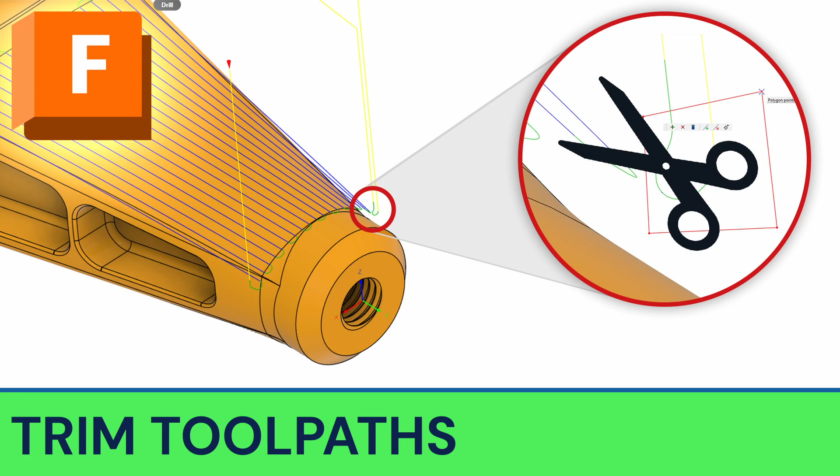How to clean up your toolpaths using the Trim Toolpath feature in Fusion. So I have this part that I downloaded from the Titans of CNC Academy, which is a great resource if you're looking for sample parts to practice programming.

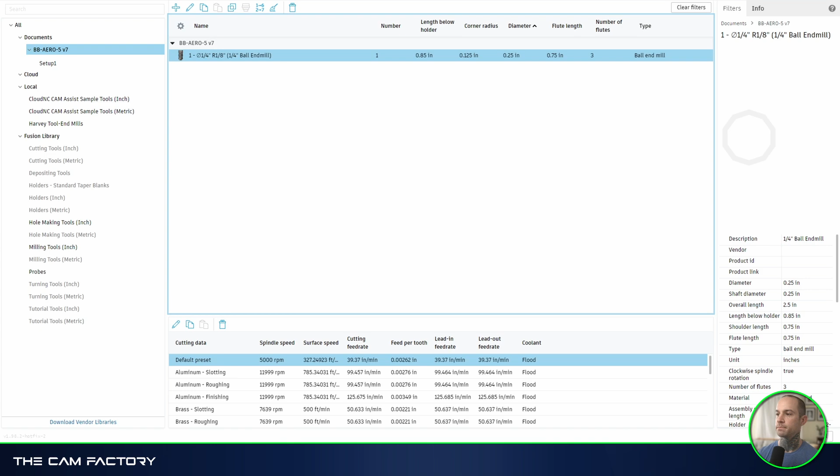I'm going to go up here and select a flow toolpath. I am going to use this face as the drive face. I am going to set my tool orientation, and let's just grab a random tool. This ball mill will work. And let a toolpath generate on there.

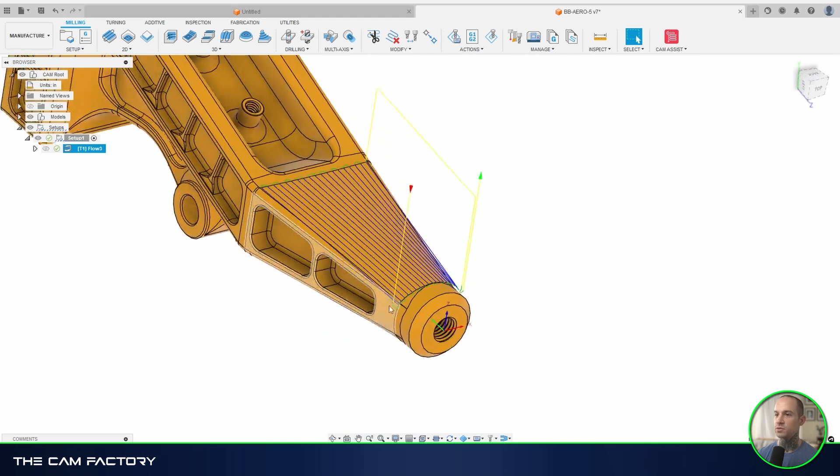Okay, so now we have a toolpath. And as you can see right here, there's an extra pass that I don't necessarily want on here. The rest of the toolpath looks pretty good. Nice even step overs blending from this line to this line, exactly as I would expect from a flow toolpath. But let's go ahead and get rid of this. And I'm going to do that with the Trim Toolpath feature here.

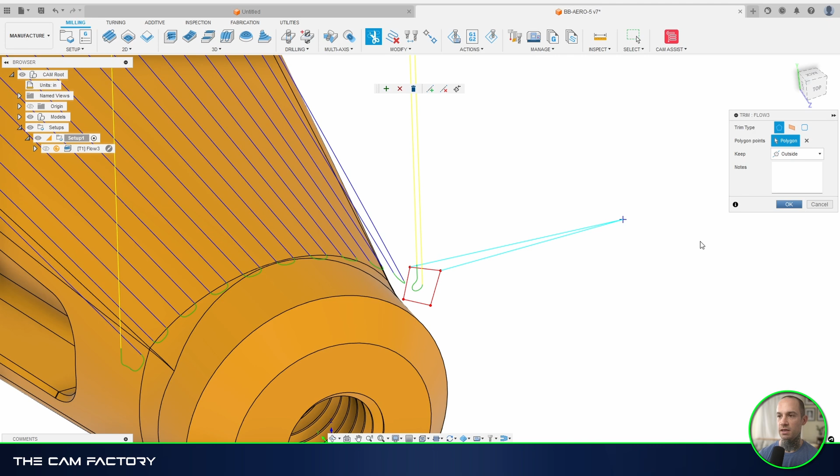And now we have a few different options for selection, but I'm going to stick with the polygon by default. And we're going to go in here and draw a polygon around this toolpath. When I click OK, it will regenerate the toolpath. And now you can see that it's removed that little pass that we wanted to get rid of. And what we're left with is a nice clean toolpath that has one entry and one exit.

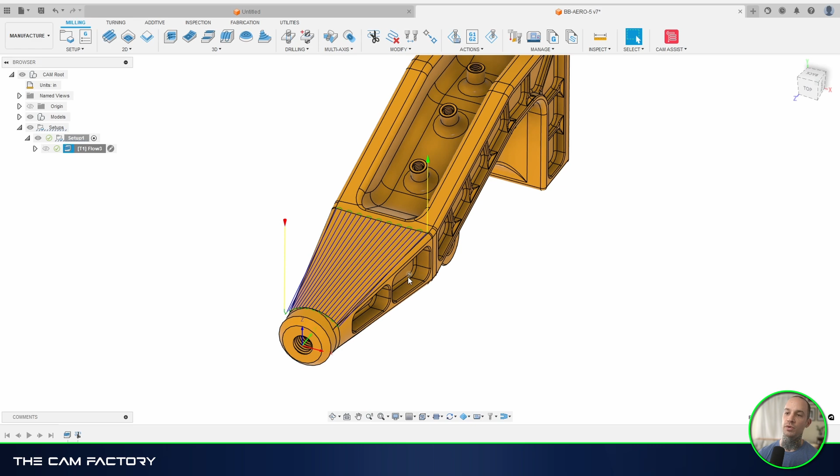Now, if we wanted to further modify the speeds and feeds and other parameters of this toolpath, we can go ahead and open this up, make those changes, click OK. And when it regenerates, we won't lose the modification that we just made.

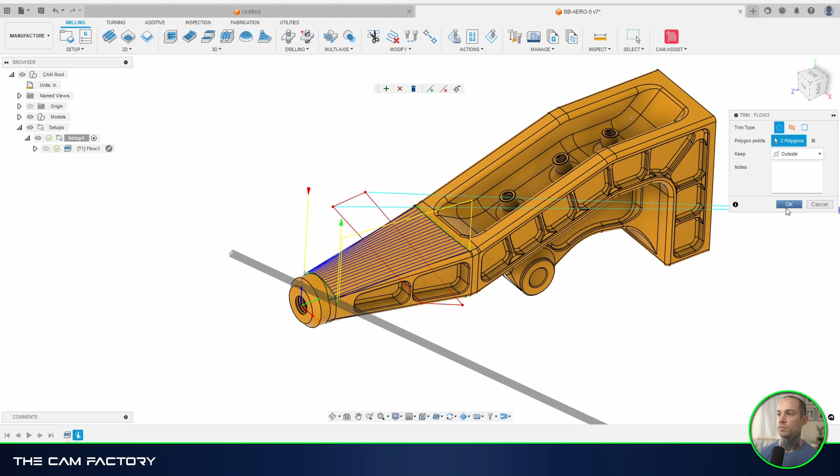Now, if we wanted to further modify this toolpath, we could click on this pencil that's next to the toolpath name. You can see the extrusion from our first sketch right here, and we could go ahead and draw another sketch, another polygon. Click OK, it will regenerate, and now we have a new toolpath with the middle trimmed out like we just did.

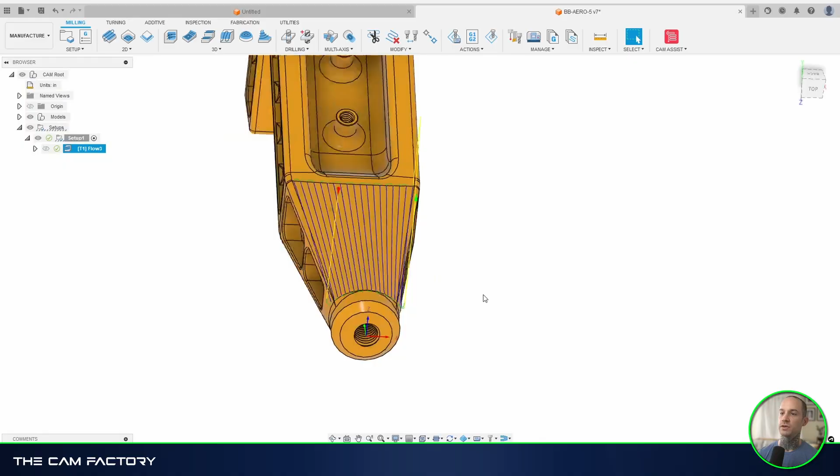So if we want to remove the modifications altogether, what we have to do is right-click the toolpath, go down to Delete Modifications, delete those modifications, and we're back to our original toolpath with that extra pass right here. And that is how you can clean up your toolpath using the Trim Toolpath feature in Fusion.